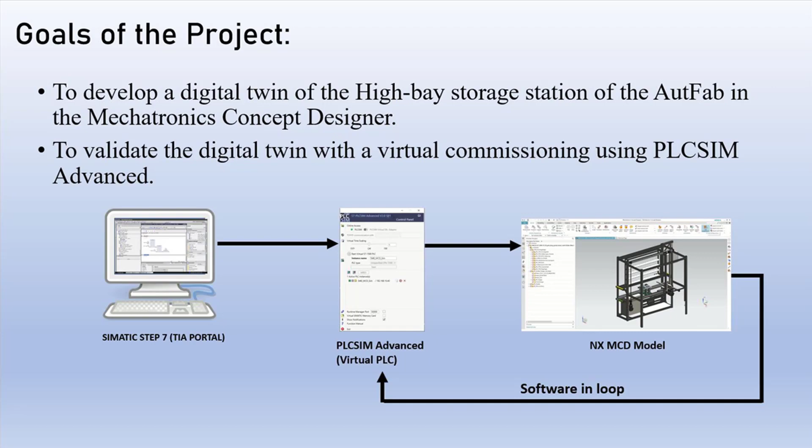The first part of the project is to isolate the high-bay storage system from the whole model. In order to isolate this high-bay storage, we'll delete all the non-required parts. After deleting all the non-required parts, we had to make adjustments in two parts of the high-bay storage system.

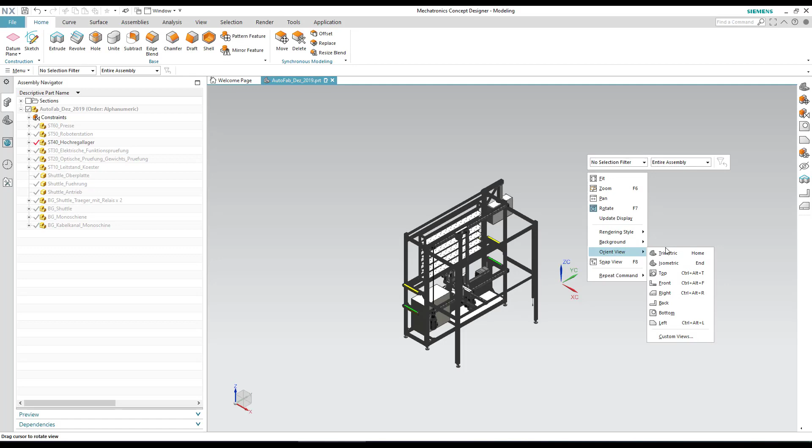The first part was in the racks. In the model given, we had 6 racks, but in the actual high-bay storage system, we had only 4 racks. So we had to delete these 2 racks. In order to delete the racks, we go to the part and select the parts we need to delete.

Here there are 6 boards and all of them are packed into one board. So we can right click the part and select unpack here, which will reveal all the parts, and we can delete whichever is not required.

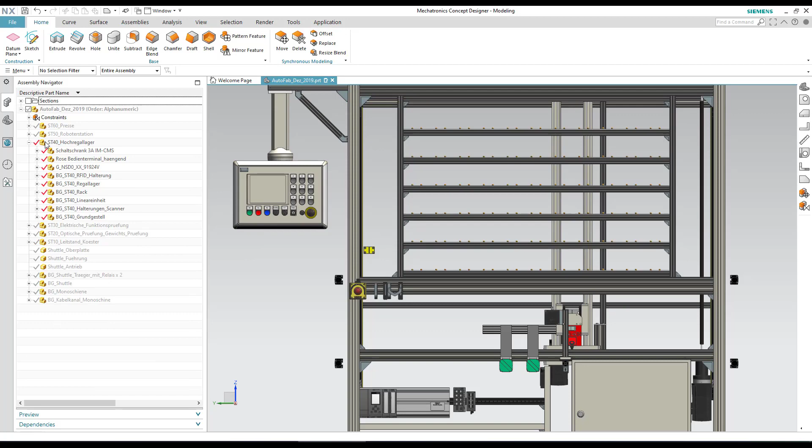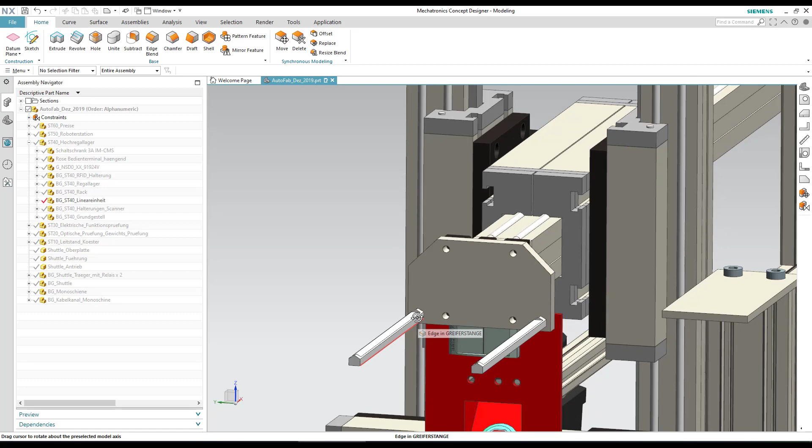The other edit is in the 3-axis robot system. The gripper part of the 3-axis robot, as we can see here, is not aligned properly. We had to move this prong 2 millimeters to the right side and this prong 2 millimeters to the left side so that it can pick up the shuttle easily.

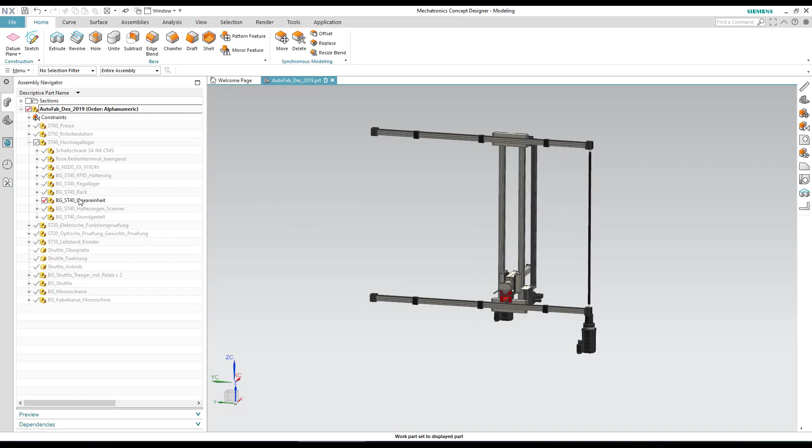Also in the 3-axis robot, we needed to adjust the axis positions and the coordinate system. To do that, we select the 3-axis robot and open it in a window. As we can see here, the coordinate system is not aligned with the X, Y and Z axis of the robot. In order to move the coordinate system and rotate it, select the coordinate system by double clicking on it.

You can rotate it by selecting this point, and you can type in how much you need to rotate, or you can just drag it. To move the coordinate system, go to the origin and drag and drop wherever required. After aligning the origin, we needed to move the X, Y and Z axis to the 0th position.

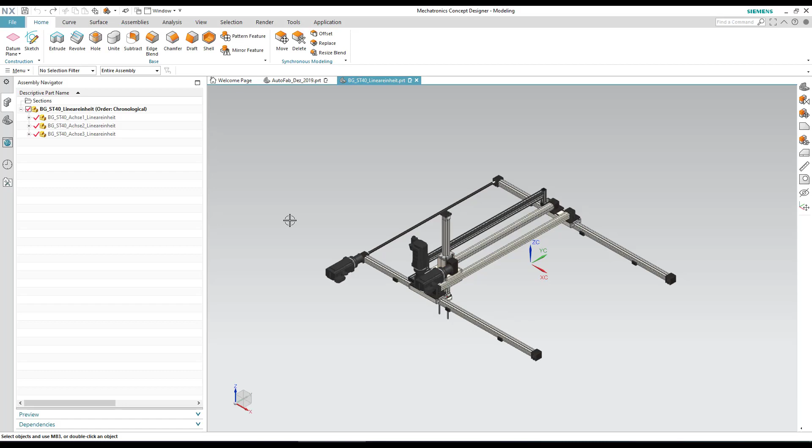In order to move the parts, first we need to apply some constraint so that if we move this axis, this will be attached to this. So we'll select assembly constraints in the assembly section and we'll apply touch constraints to the railing.

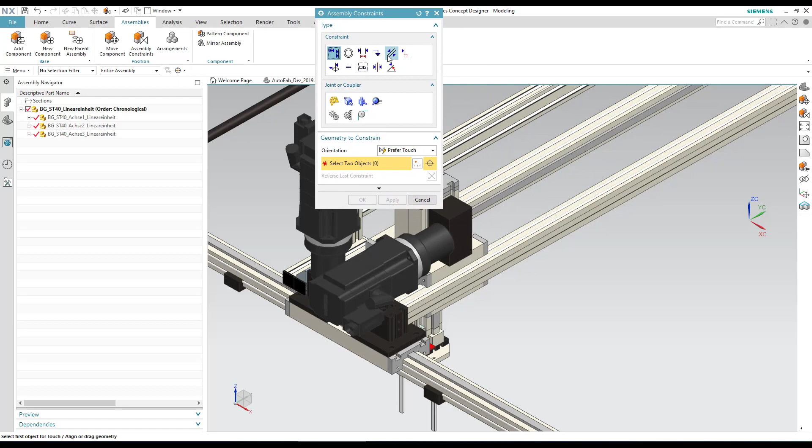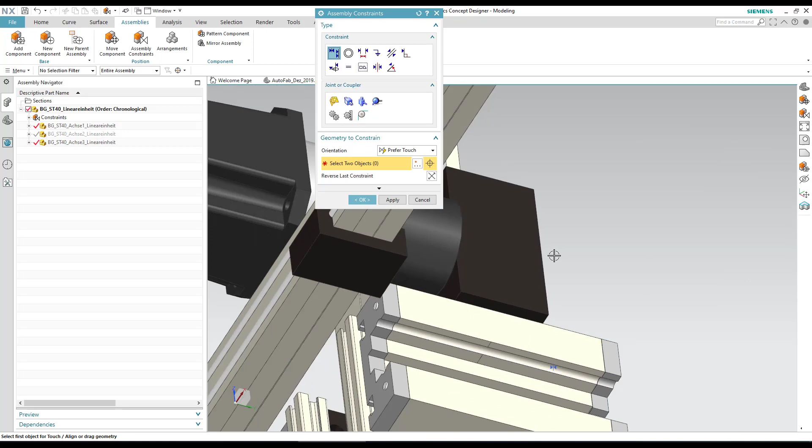Touch constraint is applied to the inner groove. Like this, the touch constraint is applied for all 3 axes between the railing and groove of this part and also of this part. This makes sure when we move one of the axes, the other moves with it.

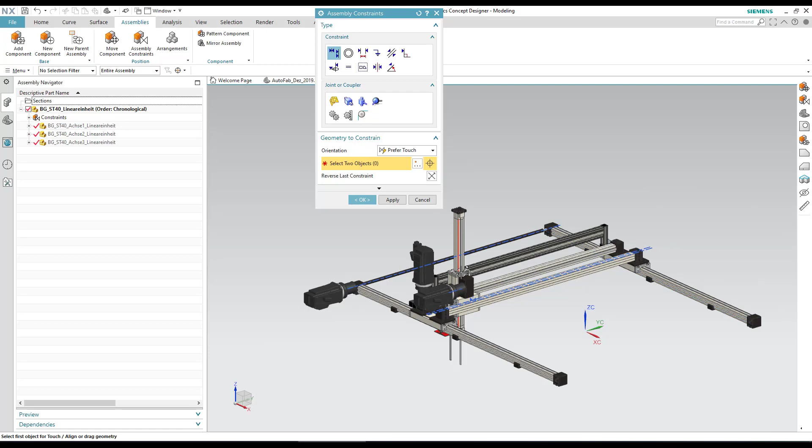After aligning all 3 axes, we need to move the axes to the 0th position so that the axis matches with the real one. The x-axis is moved 812 mm to this side, the y-axis had to be moved 212.493 mm down, and the z-axis had to be moved 41.4 mm upwards.

After doing all the movements, our 3-axis robot is ready.

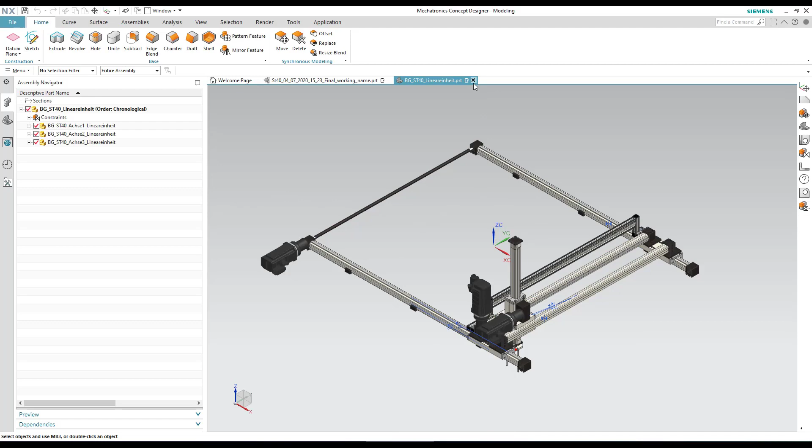After that, we need to provide physics and kinematics to the model. To do that, first we need to provide rigid bodies to the required parts. We'll only provide rigid body to the parts which will be moving in the simulation or which will be interacting with one another. For example, this part doesn't move or interact with any other part, so we will not be giving rigid body to this part.

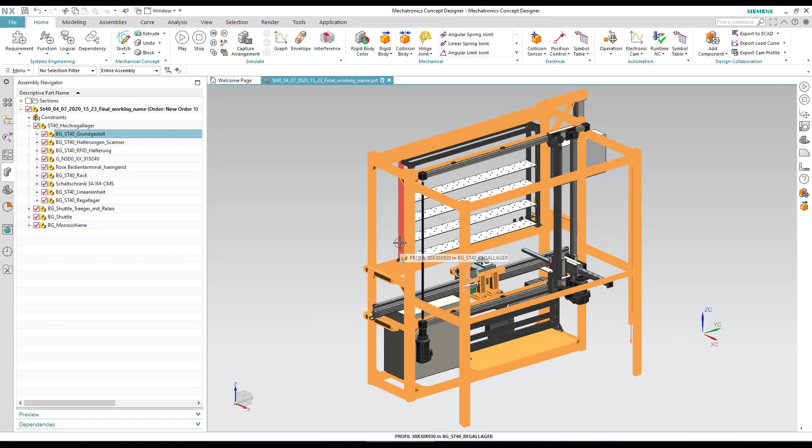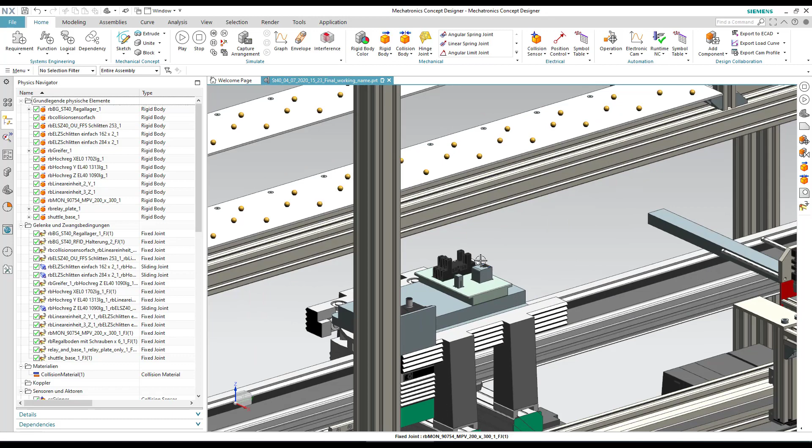But our 3-axis robot, shuttle, and rack will be moving or interacting, so we need to provide these parts with rigid bodies. Also, we need to provide collision body to the parts which touch one another in the simulation. For example, the relay plate will be touching the shuttle, and also touching the fork and the rack. So we need to provide these three parts with the collision bodies.

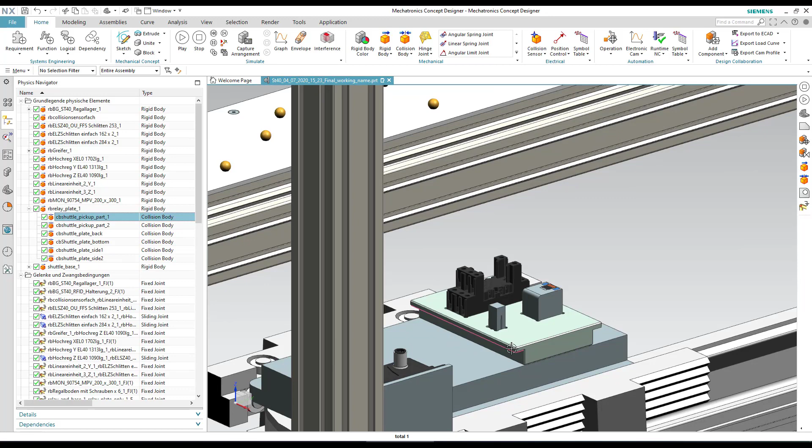While providing collision body, we need to select only the faces which will be interacting. For example, the down part of the shuttle, the back part, the bottom part, and the side parts. Also, we need to select the appropriate collision shape in order to minimize the effort on the simulation.

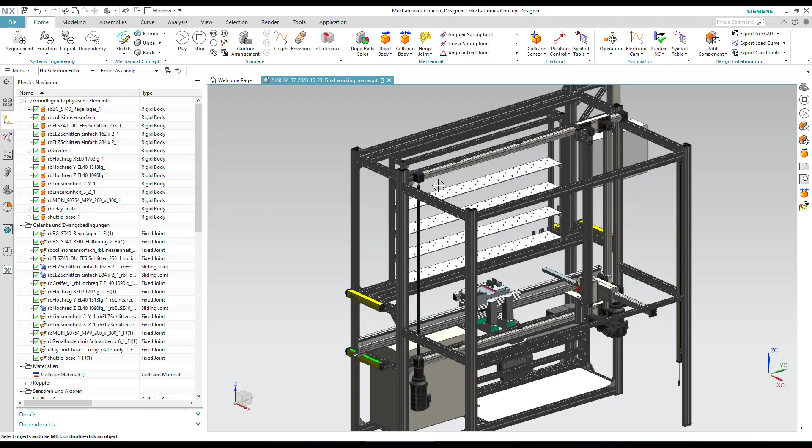After providing rigid bodies and collision bodies, we need to fix all the rigid bodies so that it won't fall while simulation. The rigid bodies are fixed in the air or to each other. The 3-axis robot has 3 moving parts, so we need to provide 3 sliding joints, one for the x-axis, one for the y-axis, and one for the z-axis.

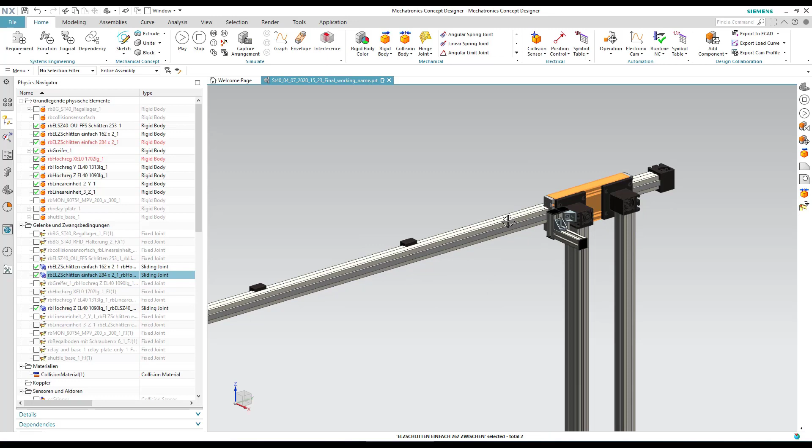The x-axis sliding joint is given between these two parts. The y-axis sliding joint is given between these two parts. The z-axis sliding joint is given between these two parts.

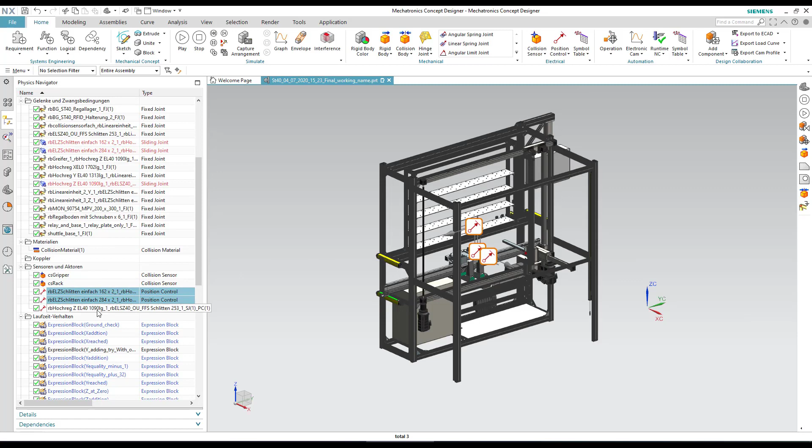To control the sliding joint positions, we give 3 position controls, one to each axis. The gripper part of the 3-axis robot has 2 sensors. The first sensor senses if there is any object on the fork. The second sensor senses if there is anything on the rack or the shuttle.

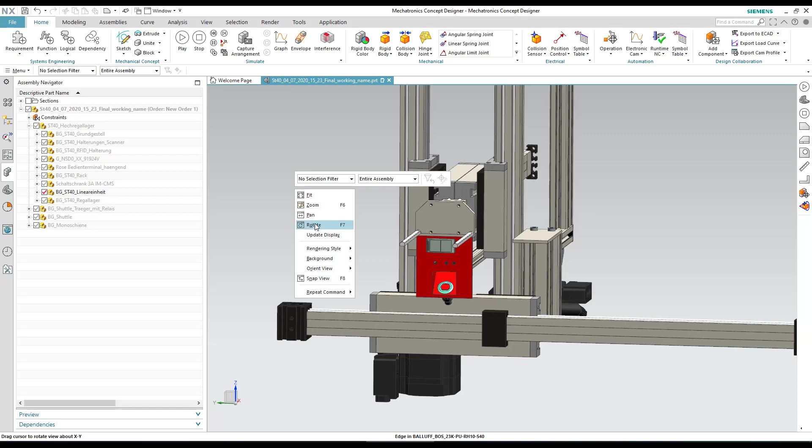In order to simulate these sensors, we create 2 collision sensors. The first collision sensor is given to the fork itself. For the second collision sensor, we create a block by selecting the block command in the mechanical concept part.

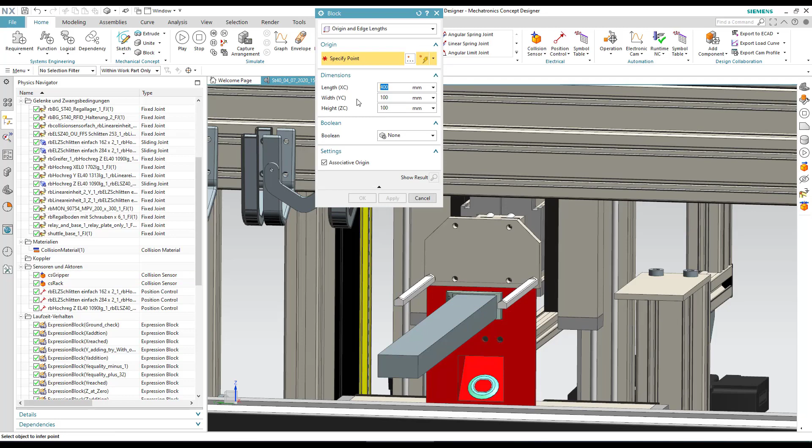We can provide this block with a collision body and then define it as a collision sensor. We can hide this block in the part navigator section.

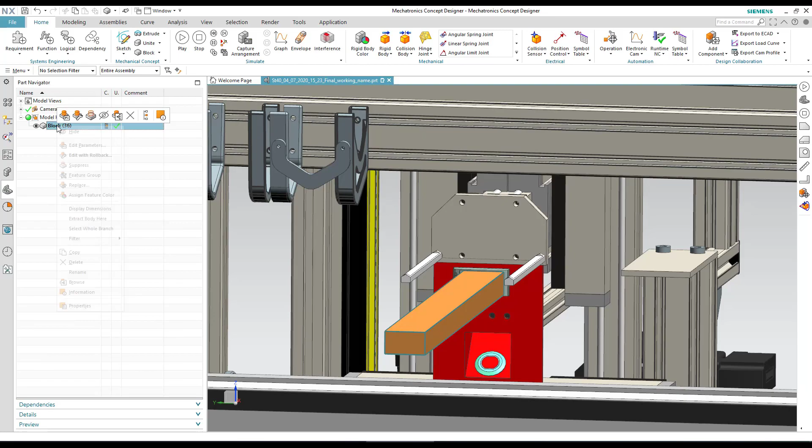After creating rigid bodies, collision bodies, fixed joints, sliding joints, and position control, we'll create some signals. We'll receive 3 float signals with the X location, Y location, and Z location, which we can input to the position controls.

We'll receive 3 Boolean signals: pickup signal to indicate the start of pickup operation, drop signal to indicate the start of drop operation, and ground position signal, which indicates the 3-axis robot to move into a ground position. The MCD in return sends 3 output signals after the completion of each operation: picked up after pickup operation, dropped after drop operation, and a ground position reached signal.

We also create 2 signals which we'll be using in the MCD operations. The last signal is the sim start bit, which we make high whenever we start the simulation.

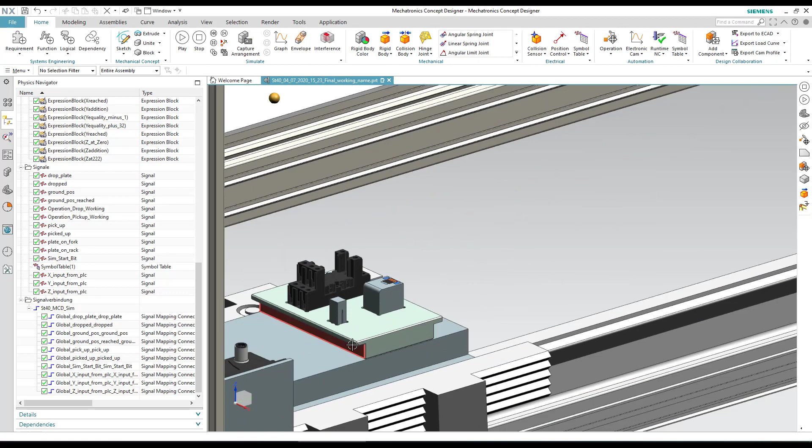For the pickup and drop operation, just the X, Y, Z locations are not enough, as the robot performs certain maneuvers. While picking up, the robot has to go under the plate in order to pick it up. And during the drop operation, the robot has to go above the rack to check if there is any plate already present at the rack.

These maneuvers are performed by C-motion software in the real AutoFab process, but here in MCD, we need to simulate these processes. To simulate the C-motion software, we are using a combination of expression blocks and operating sequences. In order to make the robot go under the shuttle or go above the rack, we need to add or subtract some values.

So we will create three expression blocks to add or subtract the values from the X, Y, Z locations. Also, these operations have to be performed in a sequence, like the Z-axis has to extend only when the X-axis has reached its position and the Y-axis has gone under the shuttle. So we will need to check the position of the position control, so we'll create these expressions.

These expressions check if the position control has reached a particular location. The ground check verifies if the X, Y, Z locations of the position control are at ground position. X reached checks if the X axis position control has reached a particular X signal. Similarly, Y-1 expression checks if the robot is ready to pick up the plate. Y equals to 32 expression checks if the robot is above the rack in order to check if there is any plate on the rack.

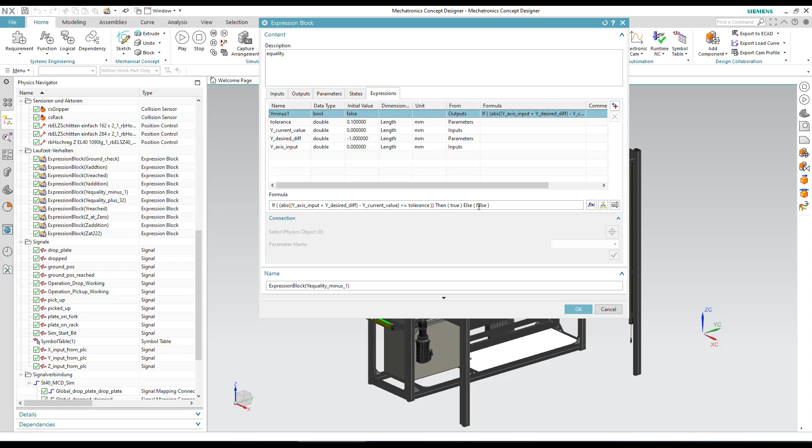Similarly, we can check the other expression type. Here, we are checking if the Y-axis has reached a certain location with some tolerance. Then we are making the output bit true, else false. These expression blocks are used in an operating sequence.

Here we have created 2 operating sequences, one for the pickup operation and another for the drop operation. The 2 signals created earlier are being used here. The pickup working signal will be made high when the pickup operation is entered, and drop working is made high when the drop operation is entered, and both bits are cleared when exiting the operation. We'll have a look at an example operation.

Here we have selected the Y addition expression block as a physical object. We are adding -1 to the Y position to make it go under the plate. We are giving two conditions: one, to check if X has reached its position, and another to check if the Z-axis is retracted.

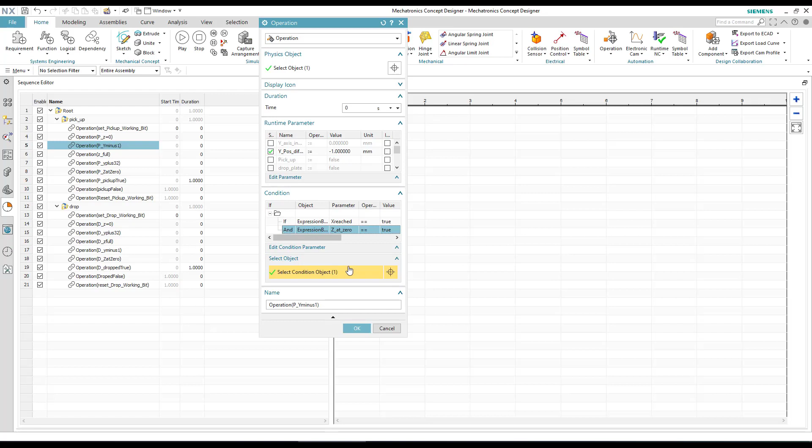So the operating sequence goes like this. First, we will make the Z-axis retract. Second, we will make the Y-axis go under the plate. Third, we make the Z-axis extend. Then we'll raise the Y-axis by 32mm. Then we'll retract the Z-axis. Then we'll make the picked up signal high to indicate the completion of pickup operation. Then we'll make it false to make the picked up bit a pulse.

Similarly, the drop sequence is also formed. Then these sequences are made to run one after the other by connecting them.

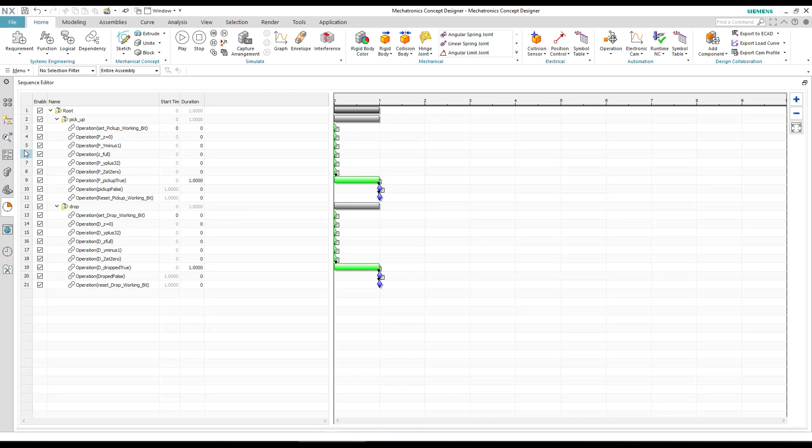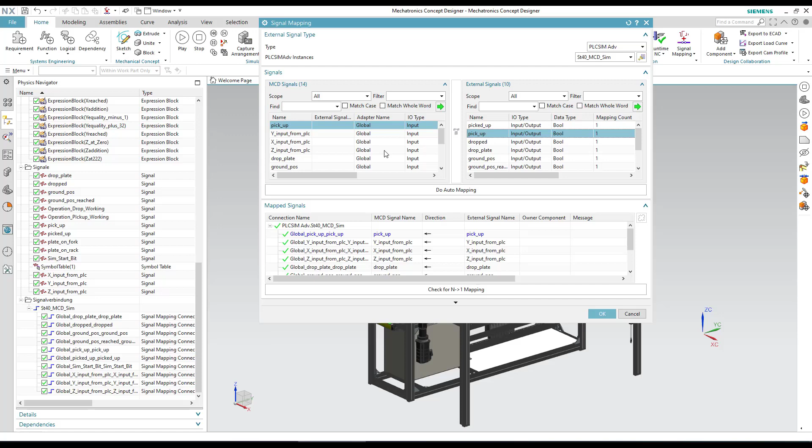Now we need to map the signals with the corresponding PLC signals, for which we'll select signal mapping in the automation section. For the signal mapping, we have to have PLC Sim Advanced running with a simulated PLC which has all these signals. So we'll select the signals from the MCD side and a corresponding signal on the PLC side, and click map signal. If the names are similar, we can even click auto mapping. Then we'll select OK.

Now we are ready for the simulation.